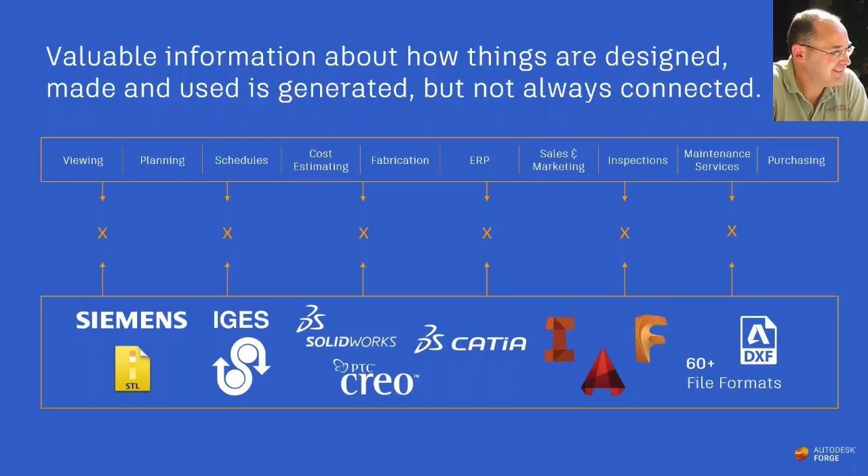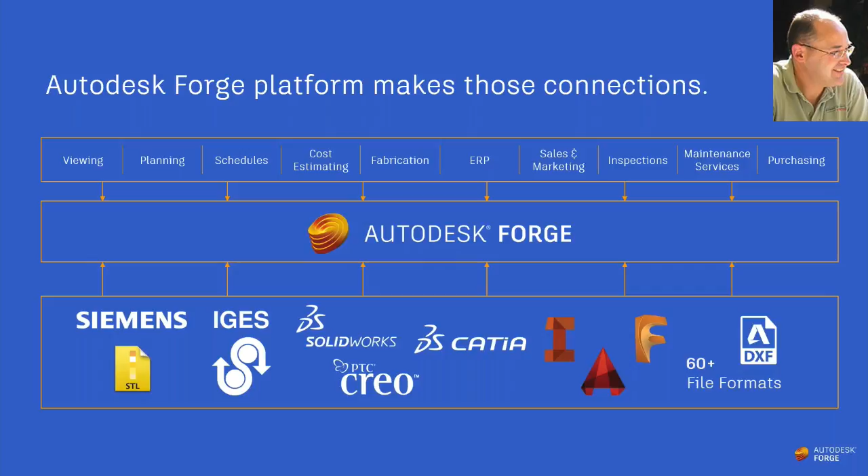So one of the several things you use Forge for is very simple, easy collaboration, working with almost any format used for design and engineering. Whether it's coming from SolidWorks, CATIA, Pro-E, an IFC file used for a building or infrastructure, an IGES or STEP file, a SketchUp file or a Rhino file, you want to share information with people, maybe visual, maybe geometric. Actually, it may be just data, just counting things, number of bolts, number of doors, checking attribute information, things of that sort. It's one of the base things that Forge can deliver, and it's very much about collaboration.

It's sharing in a very easy way. We got a lot of our early adopters of Forge building sharing on their intranets. So you get customers who want to safely share information among their employees, and they may have thousands of employees. They want a very easy way to do that, without passing around binaries that are either too heavy to work with or proprietary where they don't want to let their IP out in the wild, where you can run into rev control hell.

The other thing is about keeping data at the center, keeping that design and engineering data in one place, and different people can get the information they want when they want it, getting a view on that information from your central data repository, wherever that happens to be. Instead of passing files around. Once you start passing files around, who's got the latest file? Do you have the latest information? Was that cost estimate or project scheduling done on the latest version? Versus going to get that information right now from the current data, and getting out of these rev control issues.

Examples. So I'm going to go through a number of code samples. Some of these are code samples you can get on GitHub. Some of these are what our partners have done, so you can see what real people are doing with Forge out in the wild with our customers. I'm a real believer, and I suspect many of you on the line are software developers, and seeing a good code sample is worth 1,000 words. Or maybe you're a product manager or product designer thinking about how you might use Forge. Sometimes the best way to learn is to see what other people have done.

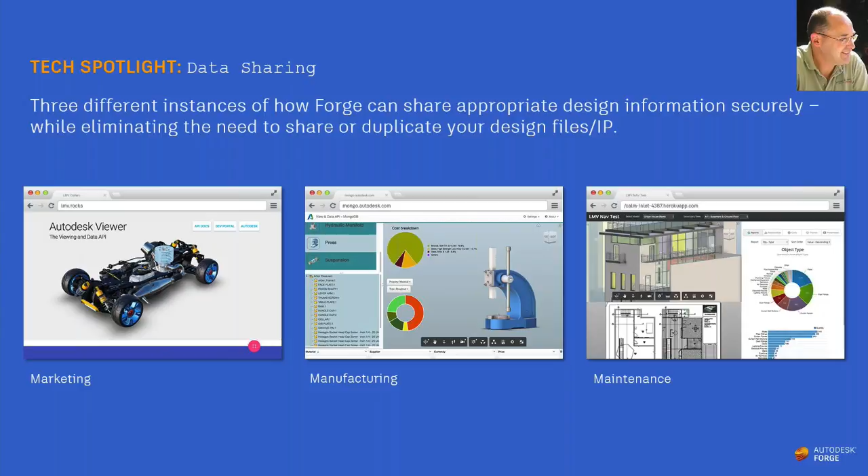So we're going to do that. Let me get my browser up.

Okay, here first I'm going to start. This is kind of a marketing website built using Forge. This is a responsive website. It looks like a bunch of JPEGs. You can open this up, this site lmv.rocks, with your phone. It works just fine. This model at the top, you think it's a JPEG, but clearly it's not. It's a model.

You can see we have lots of models here. A V8 engine, an earth mover, I've got a house, a car. Some of these models are from SolidWorks, some are step files, some are for Inventor, some are from Fusion, some are from Revit. Doesn't really matter.

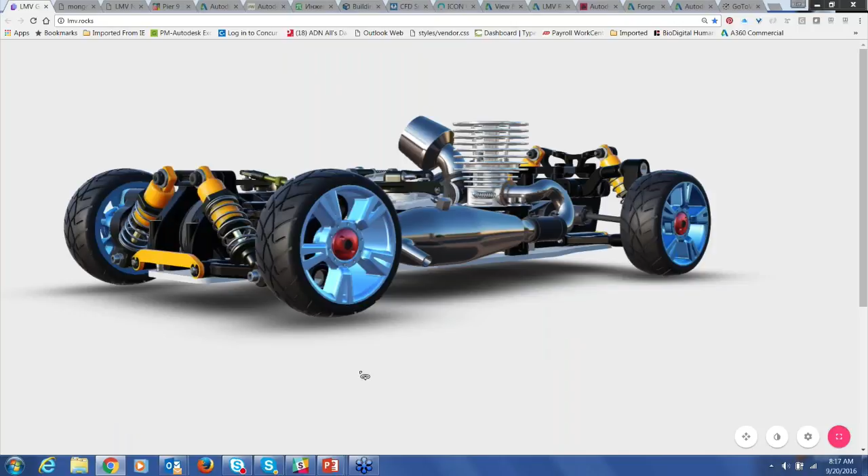Because this is engineering data, it has structure, so you can do things with it. For example, here, I'm just going to explode this. We'll take it apart, and it actually comes apart smartly. It comes apart firstly at the very top assembly level, then as you start to pull it apart, it starts to pull apart sub-assemblies and sub-sub-sub-assemblies. You can go in here and get information you want.

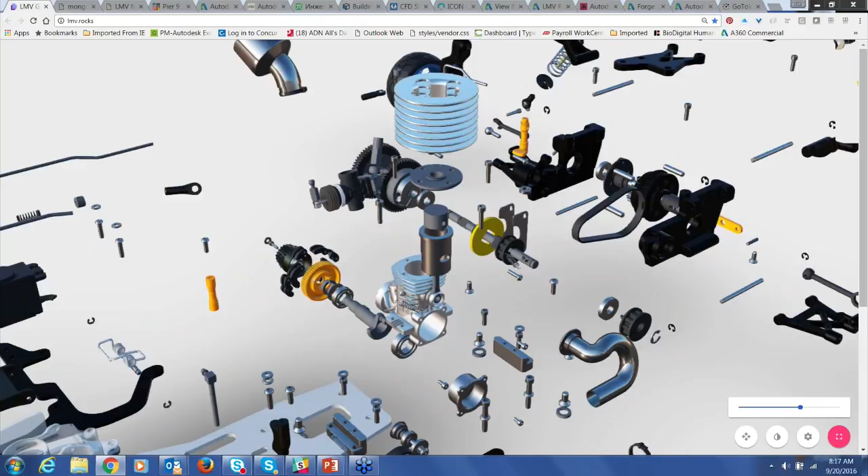Again, this is on a browser. This works on Safari, Chrome, Firefox, Opera, Microsoft Edge, the very latest version of Internet Explorer. I will tell you, Internet Explorer itself has been a bit cranky because this is based on WebGL, so just be aware. It's also based on quite a bit of open source. The viewer uses Three.js underneath. So as a developer, there's the APIs we give you access to, but there's also the APIs of Three.js itself, should you want to hack it, so to speak.

So I'm just going to pick this house. You can see this house loads up. It's got materials, it's got a model. This works with office buildings and is pretty scalable. The largest model I've ever seen using in Forge was 9 gigabytes. It was like 25 linked Revit projects, and it works just fine. You'd be surprised.

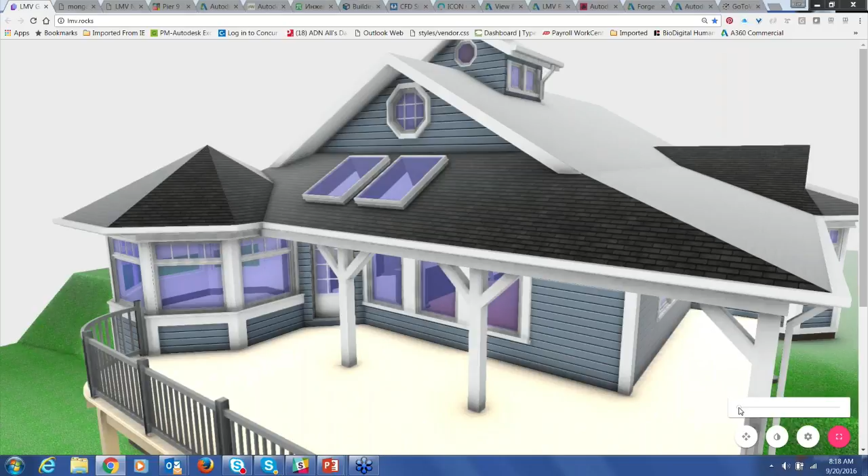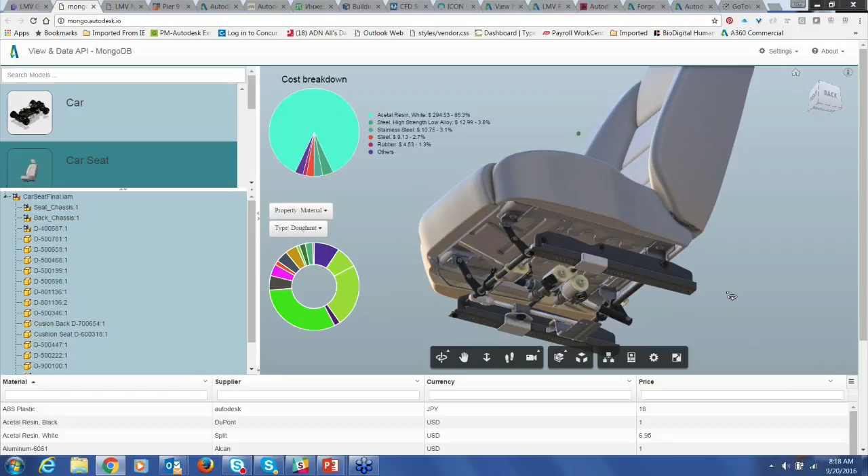Another example, thought it was good to show that often when sharing, there's data coming from external data sources. So we have a model here that came from Mechanical Modeler. This one came from Inventor, but again, could be SolidWorks, could be ProE, could be a StepIges file, could be a building, could be from Revit, could be an IFC file. In this code sample, we've linked it into an external data source, and we're using a Mongo database.

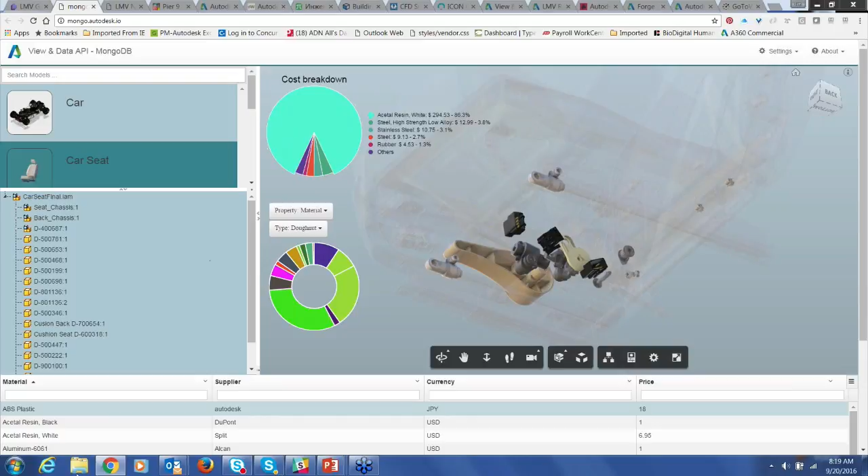I'm just going to double click on ABS Plastic, and it drives the view. Here's all the ABS Plastic in the model. And I can do things like update the cost of, well, here, see this? Acetal resin is clearly really expensive. So acetal resin white - I'm going to go here and change the pricing of acetal resin white, and you'll see this JavaScript pie chart update when I do this.

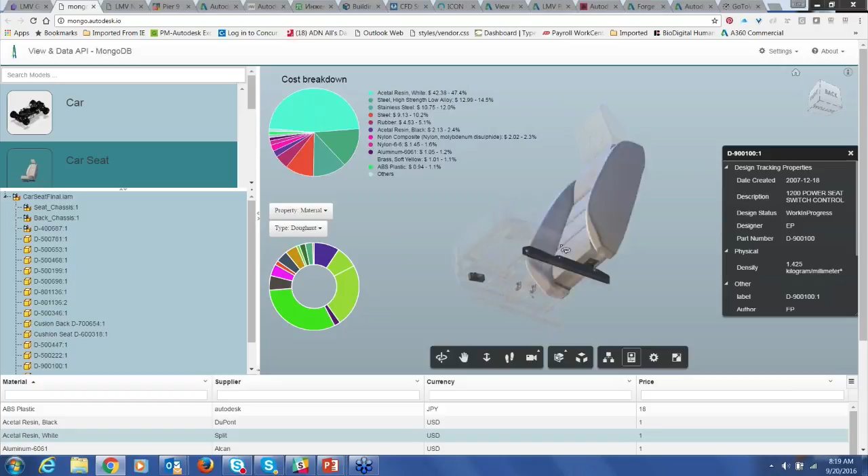Right, because it's JavaScript, I'm in a browser. This is a website that was built in less than 2 days by a full stack web developer. And look at property information. So let me go in here and pick this part.

Center of gravity, area, density, mass, volume. This information all came from the model. Design tracking, part numbers. But down here, database information. This data is not in the model. This data is coming from an external data source.

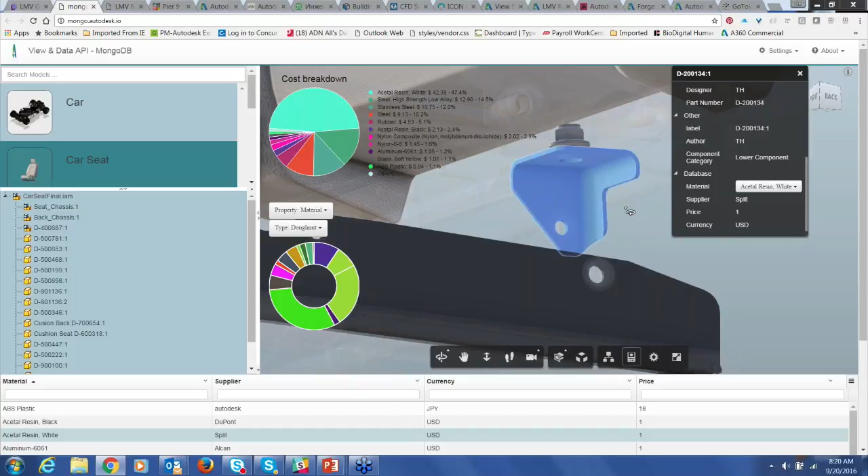We've done this same sample with SAP, NetSuite, Salesforce.com, Microsoft SharePoint, and it's relatively straightforward. Most design entities have a unique ID, an identifier. Frequently, it's a GUID, that you can use to create that key link between an external data source, whatever it happens to be, and the model itself.

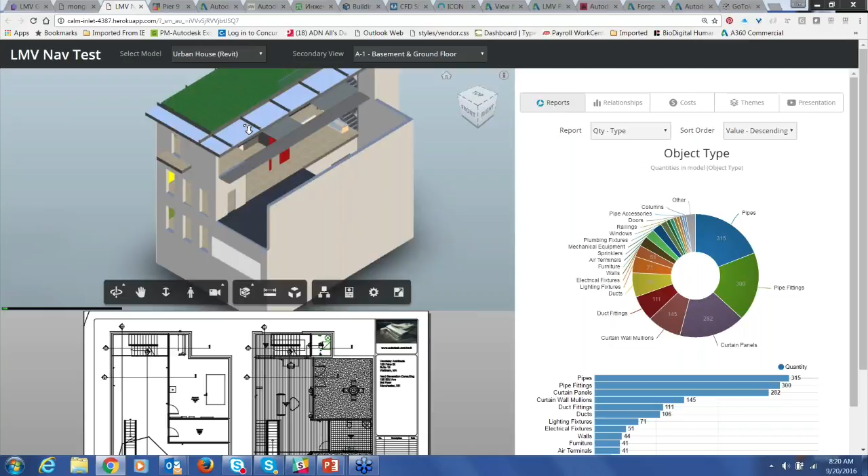Another example, mixing 2D and 3D. I've got 3D, I've got 2D. I can go here to my pie chart. This pie chart, these bar charts, this is just open source JavaScript graphing. So I'm going to pick ducts. Now, look here, I've highlighted in 2D, I've visualized in 3D, just by clicking on a pie chart.

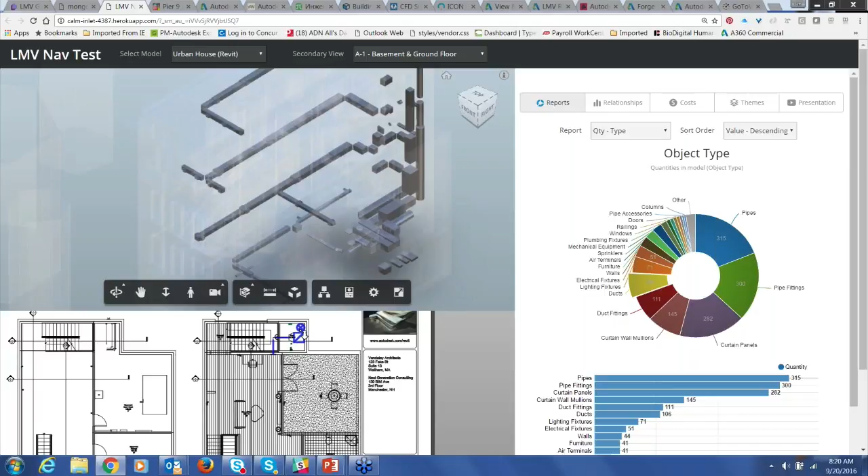Maybe I want to see the pipes. Again, highlighted in 2D, visible in 3D.

Let me do something like, let's look at properties. Let's go in here and look at the property of this fitting, pipe types, offset, start offset, end offset. What kind of system is this? This is a sanitary system. It's a copper pipe, it's 4 inches in diameter. All this engineering information available.

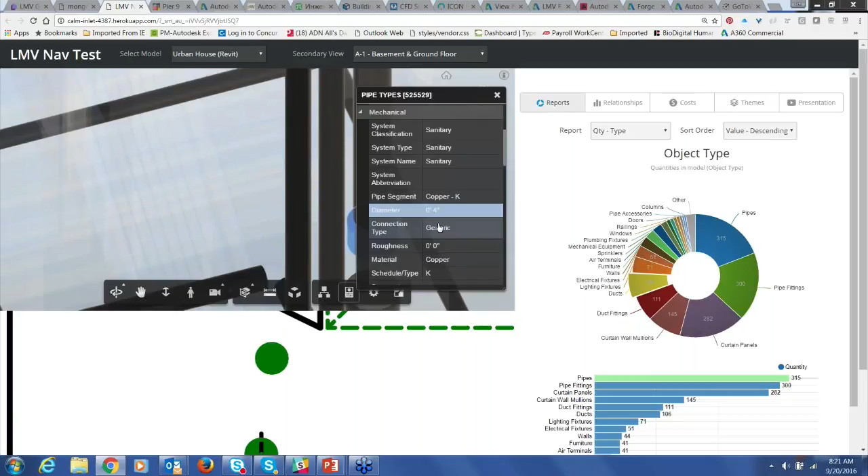Now again, depending on who you are, maybe you want to work in a 2D view, and you can do that. Maybe you want to work in a 3D view, and you've got these pie charts, which are basically doing queries on the metadata, on the attribute data.

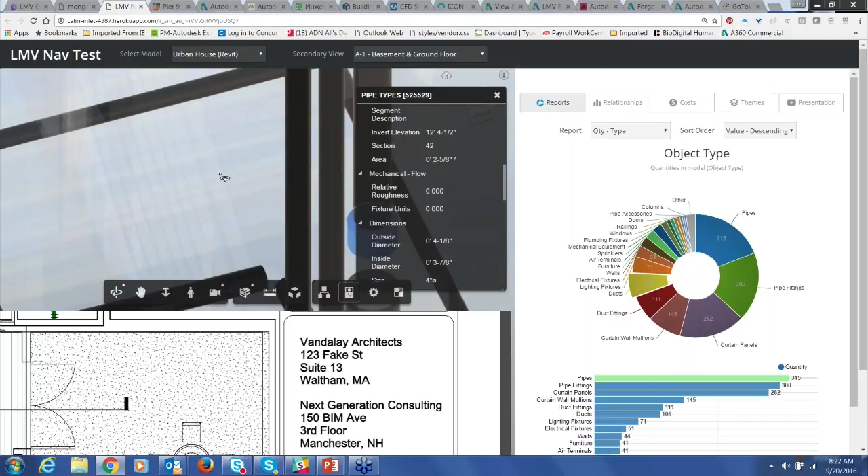This was a website that was put together by one of our engineers. It took him about a month, but he was taking 2 hours here, 2 hours there, so it's kind of less than 15 hours total. And he was just learning, it was kind of first time through. If you have a full stack web developer, you can grab this code sample and build a similar 2D, 3D experience in a day or two.

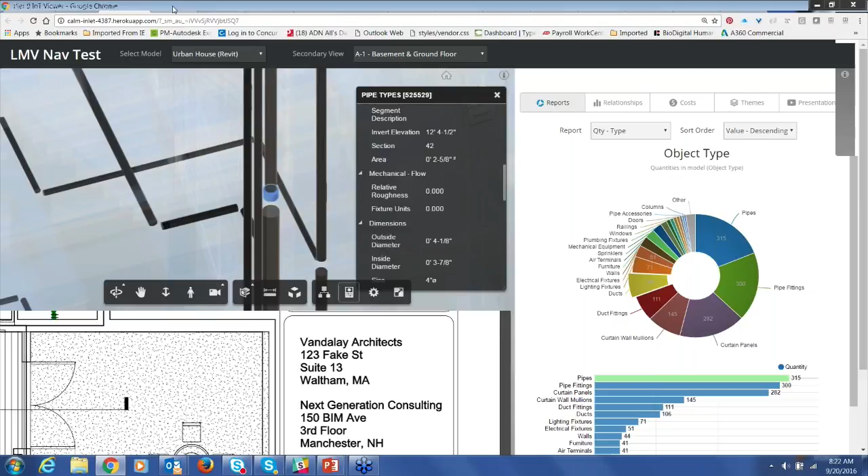Some other things we've been doing for fun is hooking up models to real-time sensor data. So we'll call this fun with IoT. This is Autodesk's Pier 9 lab. We've got a machine shop there. I can go here, click on this icon, and here's live sensor data from the machine.

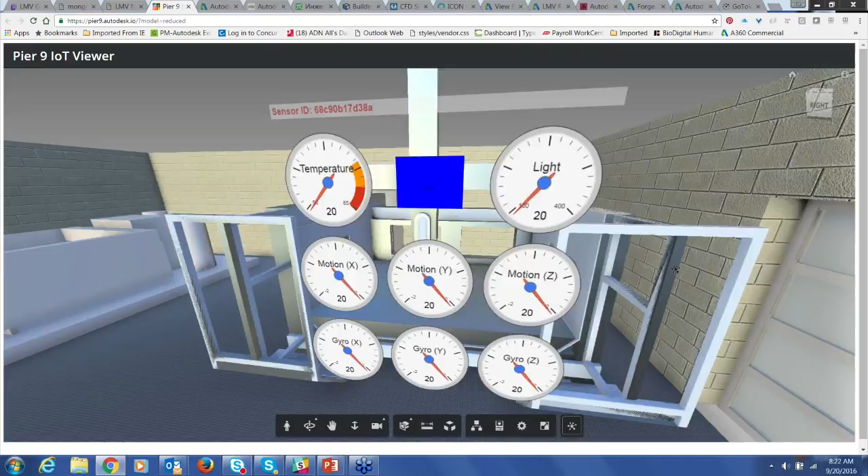Now, reality is I'm not getting sensor data right now because the sensor data is not live at the moment, but I think you get the idea. Let me just show you that again, I'll pick a different machine this time. All right, so maybe I want to come over to this machine, see this sensor data. So an interesting way to project data.

We've also got some code samples that do things like take the data, and instead of giving me dials, it gives me numeric values. We also have it where we've done thematic mapping, so maybe you want to see the temperature of a surface in a thematic, color-coded kind of way.

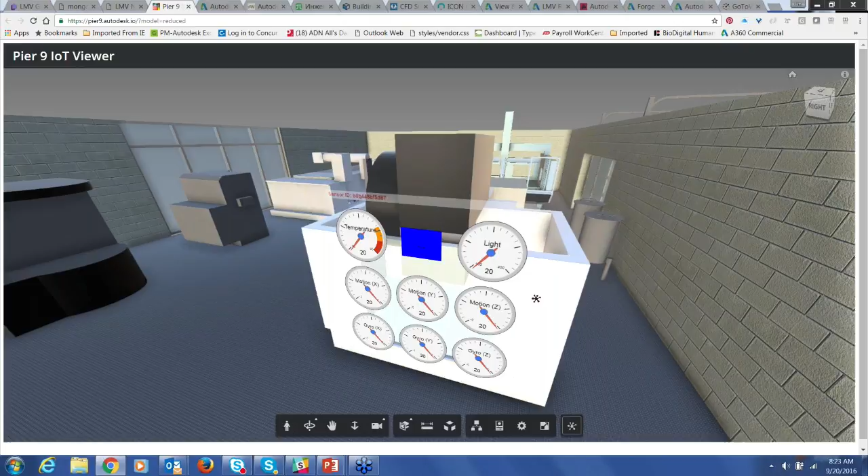This is a new one. This is a very simple, trivial thing, but I think it really helps make a point because at this point people are going, how do I get my data in so Forge can work on it? So we built a little code sample that shows using Three-legged OAuth. It allows me to pass my files that are in Box, this is my corporate Autodesk Box account, to Forge, so I can view things that are residing in Box that are not residing with Autodesk. And it's a perfect example of Three-legged OAuth.

I've got to log into Box. I've got my account, but now it goes, hey, this data is actually within Autodesk, are you Autodesk authorized? So now I log into my Autodesk account, and Box says, hey, is it okay, Autodesk gets access to this Box data. Okay, now what you see here are all my folders on Box right now. And I can go here and pick a part or a model or whatever.

Now I'm going to do a bit of an endurance test here, this is asking a lot. So Autodesk Hospital, this is actually a very large Revit project. See this? Preparing the view. Autodesk Hospital metric, it's preparing. And you'll see how fast this is, hopefully things are fast. Oh, translation in progress, you'll get an idea on how fast one of your models can be. And here it comes. This is, you'll see here in a sec, this is not a small model.

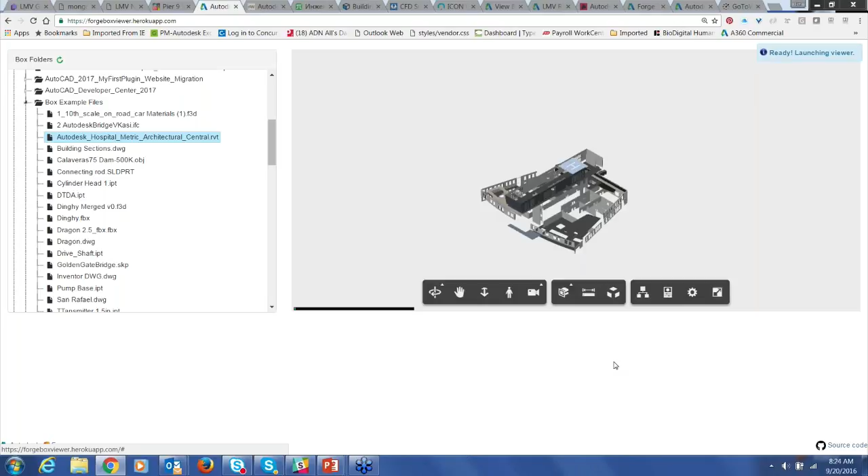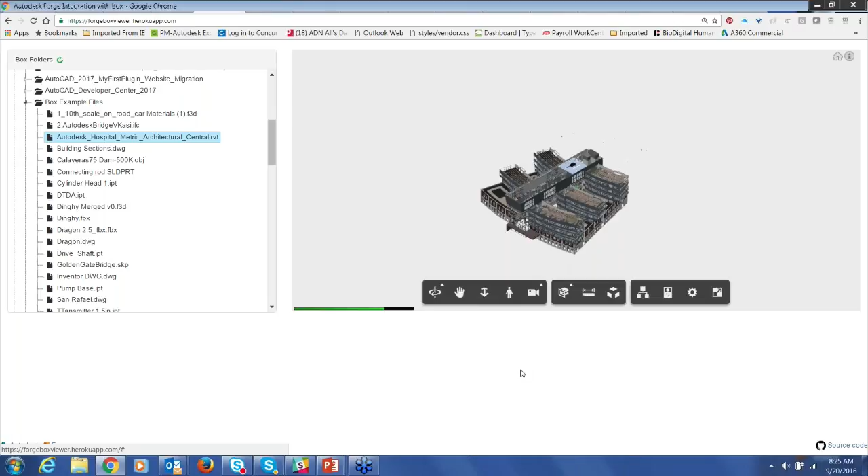Now this code sample actually uses what we call a transient bucket. It passes through Autodesk for a very short period of time and then gets deleted. It's taking a sec to load up all the detail of this hospital. I'll give it a sec to do that, and then we'll zoom in and take a look, and you can get some idea what we're dealing with here.

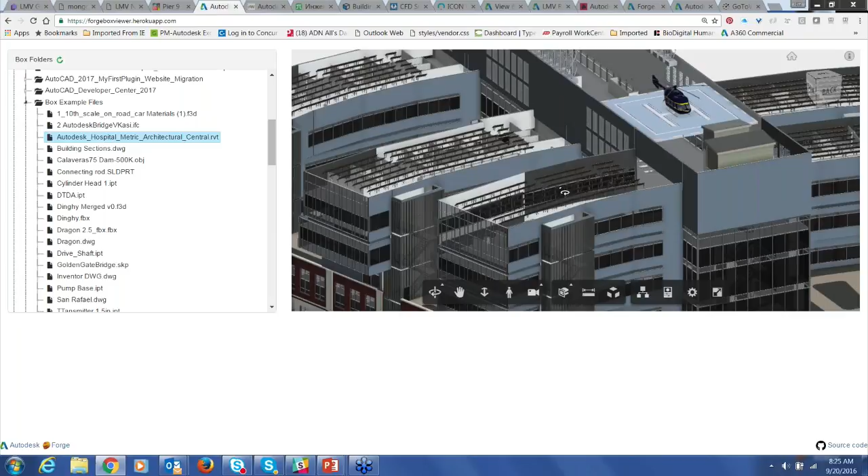All right, so here's this hospital. In fact, when I go in close, we can see the helicopter sitting on the roof. It takes time for this model to refresh. You can see the solar panel sitting on the roof, and I can do crazy stuff like section this big hospital live in real time.

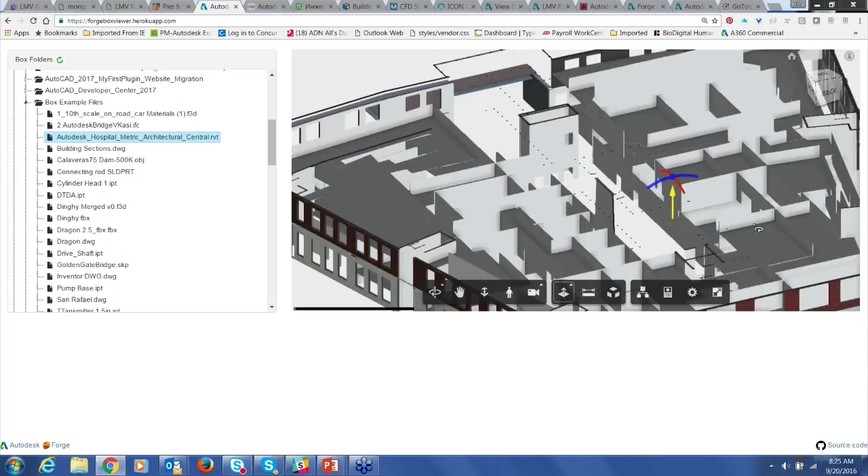Let's do a section. I'm going to pull down here so we can see things like what the floor plan looks like in this hospital, or what the lobby looks like. Let me go way in here. Okay, very simple code sample, shows you how you get your data in and visible from wherever that data sits today, whether you have it up on the cloud or it's sitting on some local server.

So those have been Autodesk code samples. I thought I'd now show some examples of what partners have done.

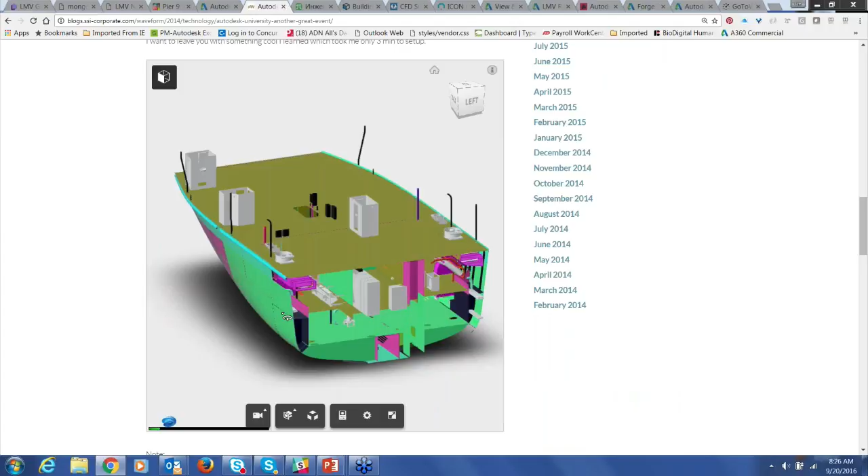Here's a partner of ours, ShipConstructor, who has a blog. It's a customer blog. They show their shipbuilding customers what's possible. They stuck a ship into the web page of their blog. I like the fun part: it says here, took me 3 minutes to set this up, 3 minutes to embed a model into a web page.

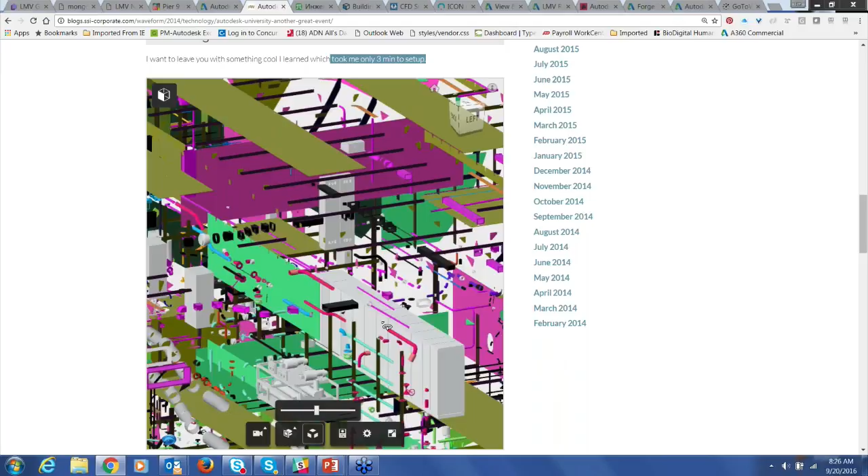And some of our partners, they shock me, because this is not a small model. I'm going to take this apart, and you can kind of see how big this model is. It's huge. And then we can do things like look at properties again, which is for a shipbuilder.

This is what it's really all about, right? Material. Here's that GUID we talked about. Most entities have a unique ID for an external data source. You can see now, with a little luck here, material.

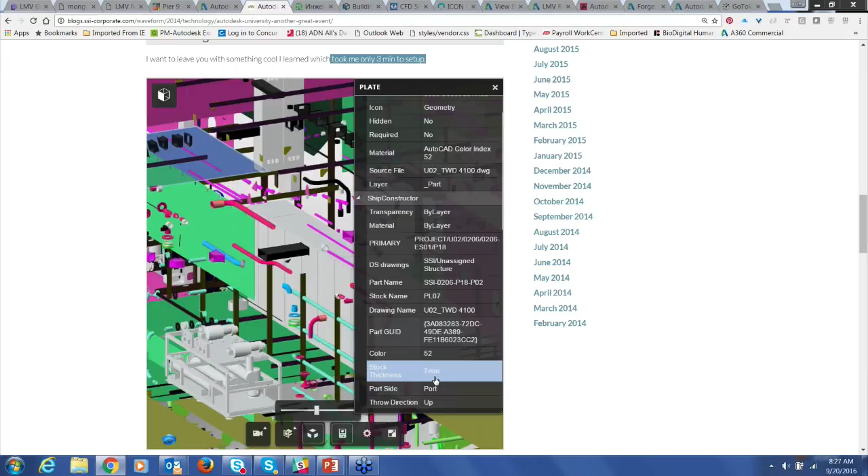LCG, TCG, VCG - you know what those are? Those are the coordinates of the center of gravity of that part, that piece of steel. Ships are made of steel - 1/4 inch, 1/2 inch, 1 inch, 2 centimeters, 3 centimeters. These parts are heavy. You do not move many individual pieces of steel around without a crane, and you need to know where to grab it.

So the idea is that you're down in the shipyard and you're hooking up this piece of steel to an overhead crane, and you need to know where the center of gravity is, and you can get it just from having a laptop or even just your phone there.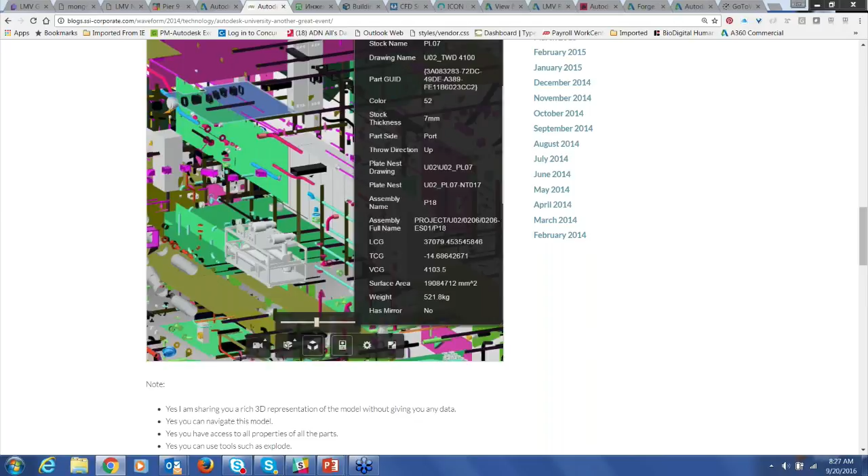Another example, this is the dean of, I think, the School of Civil Engineering at St. Petersburg Polytechnic University. He saw Forge and said, hey, I want to show off some of the work my grad students are doing. So they went and added 2 models to his website. Again, this was like a 10-minute kind of deal.

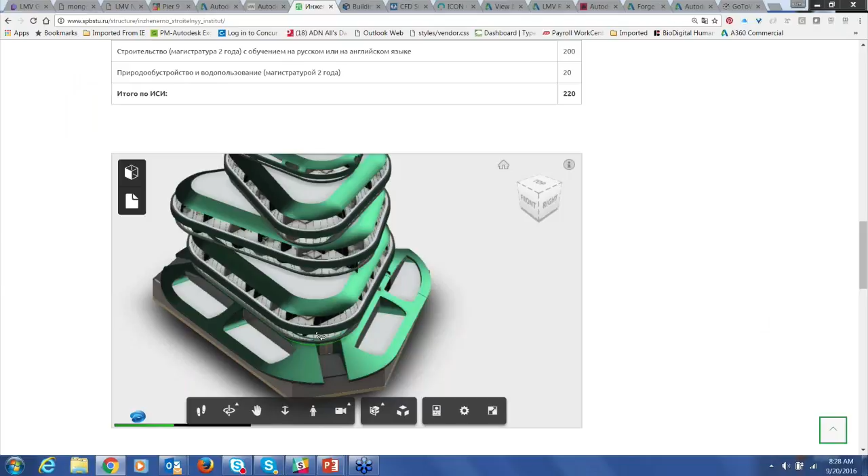I'm going to have some fun with this one, and we'll cross-section it because this is such a crazy building. All right, so we can go in here. Maybe I want to find out what the building core is about for this crazy building. I can go right in here and see what's happening in the building core.

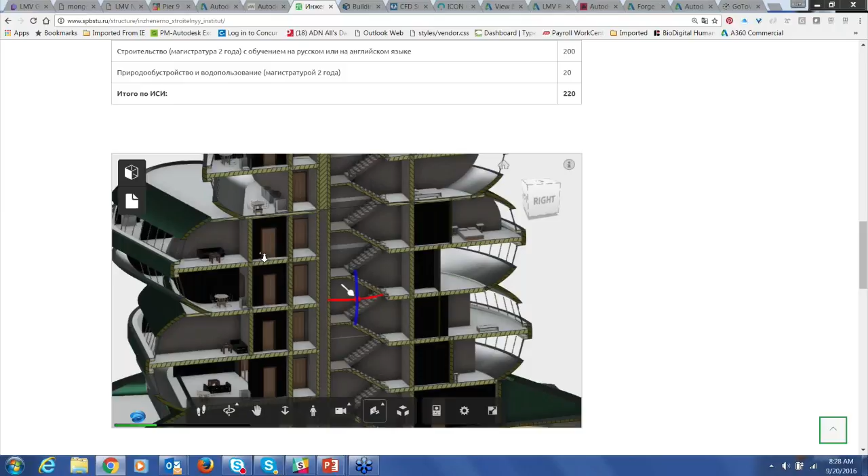Another example, a partner in the Netherlands is helping their customers, construction companies and architects, show off the work they've been doing with building information modeling. They have hundreds and hundreds of, in this case, Revit projects up here online, open to the public. You can go here.

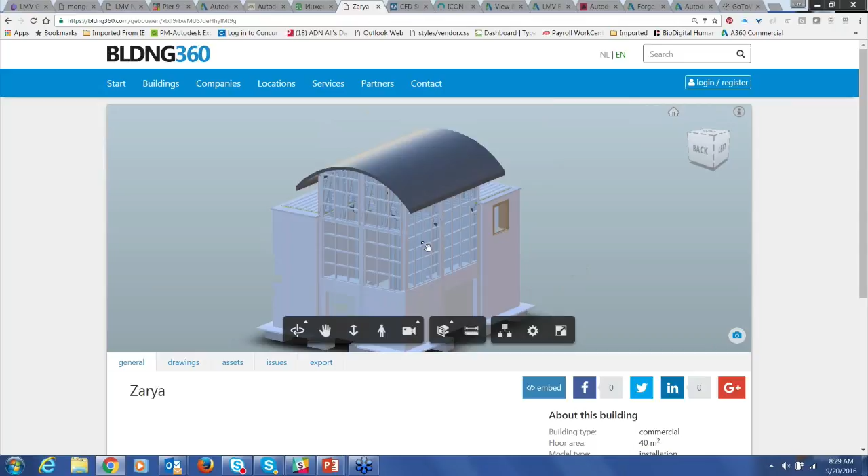Here's a building. Again, maybe I'll show sectioning so we can kind of see what the floor plan looks like. All right, so here's the floor plan. Oh, maybe I want to tilt it just for fun. Maybe I want to do a vertical section, something along those lines. So I can do sectioning, and he's changed the UI completely.

For drawings, he's just made that a tab. Here's the drawings, and I can just pick a drawing, and there's the drawing. So he's kind of changed the UI up to make it easier for people to navigate 2D, 3D.

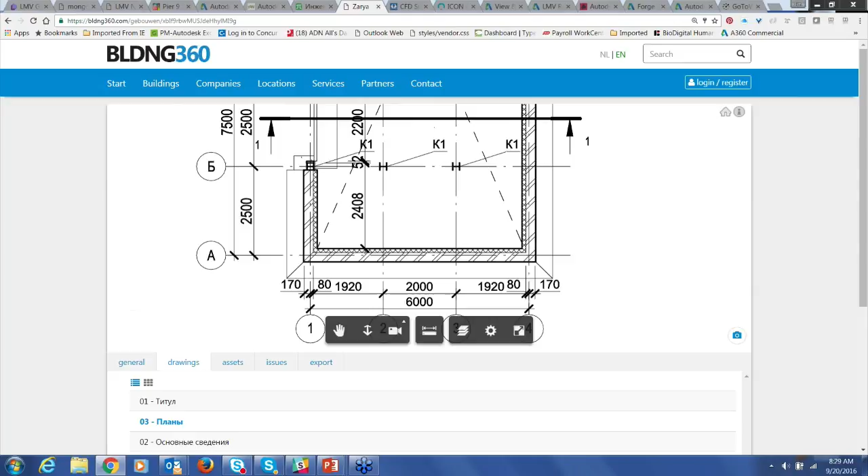Here's a partner doing CFD. This is a partner who really took advantage, they know WebGL, they know Three.js, so they wanted to push the technology. This is CC Tech in India, and as an aside, they're a consulting company doing system integration work. Should anybody want help, they offer a good value price, being based in India.

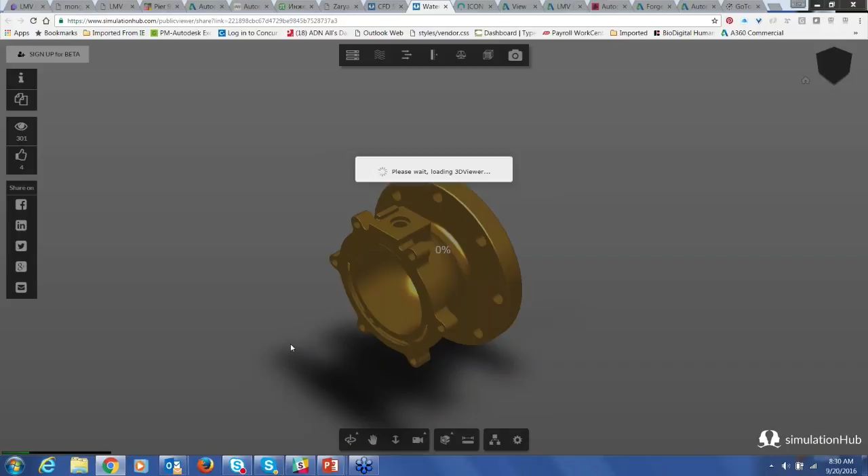So they're using Forge here, and here's their sectioning. They've done crazy stuff like adding animation, and you can see the flow lines being animated. Again, the beauty is using Forge, they already had a CFD solver code, so using Forge with the solver code they already had, they put this together in a week or two. They've also done stuff like you can see in the corner, with a different user interface for section cutting.

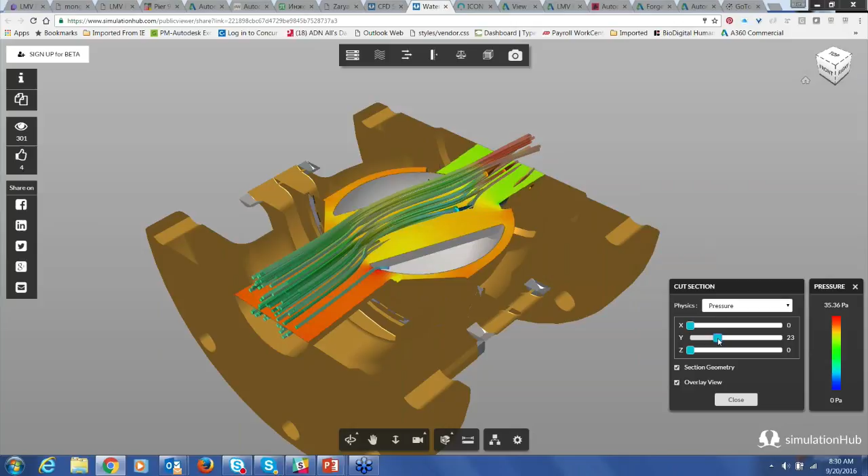If I want to move this section, I can use these sliders. They've actually left the Autodesk standard Forge Viewer sectioning in too, so it's easy to do.

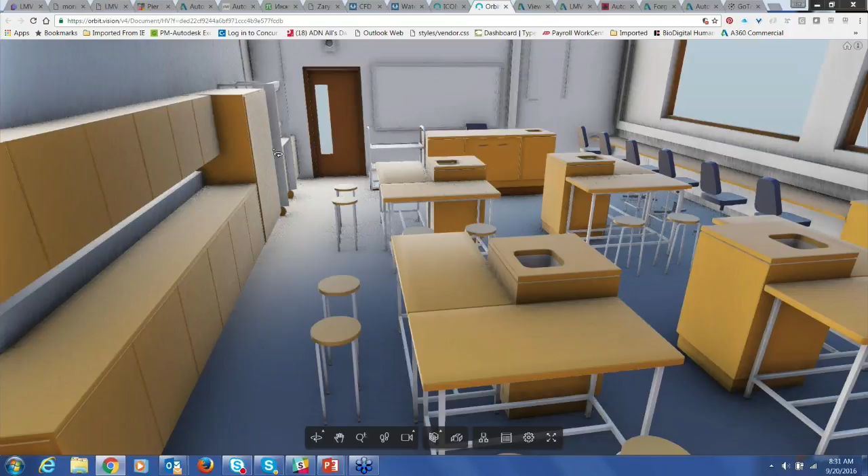Another partner of ours, Icon, helps retail stores. I think the 10 biggest retail stores in the UK are customers of theirs. They're giving their customers the ability to view their facilities, both what they have today and what it could be in the future, what a new layout might be. They've integrated Forge into their website so their customers can navigate and see. This is some kind of lab, like in a university or a school.

Now for those of you into reality capture, point clouds and mesh, flying drones, that kind of thing, I thought I'd show you the result of the reality capture API, which is not public beta yet for Forge. We expect it to be public beta by the end of October, if not fully released by that time.

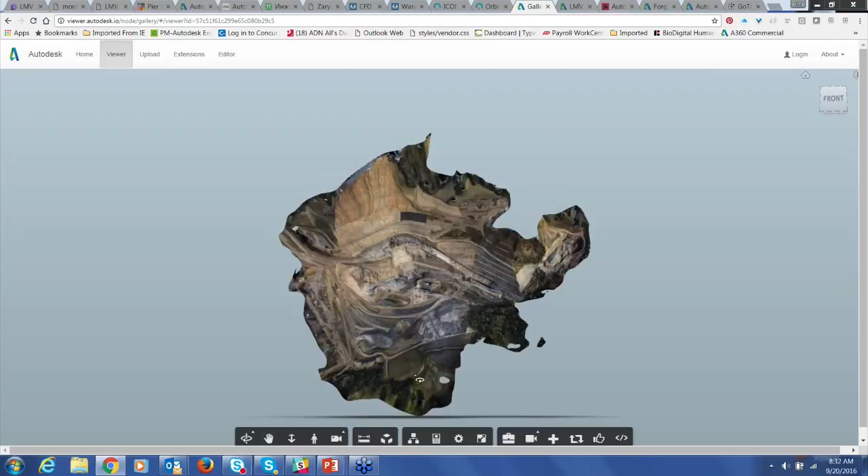This is about taking photos and turning them into 3D meshes, where you can do things like diffs - maybe find out how much dirt got moved, or do a survey. This is a dam site here in California. Maybe I want to inspect it, right? So I fly a drone, spend maybe an hour taking pictures, bring it back, upload the pictures to the Forge Reality Capture API, get the mesh, pop it up on a website where people can check it out, and do all that in a couple hours, a morning so to speak.

So you can survey a construction site every day and see what's happening. We've got a model here, this is the 500K triangle model. I have one with 2 million, but it's actually not all that much slower. So it works amazingly well.

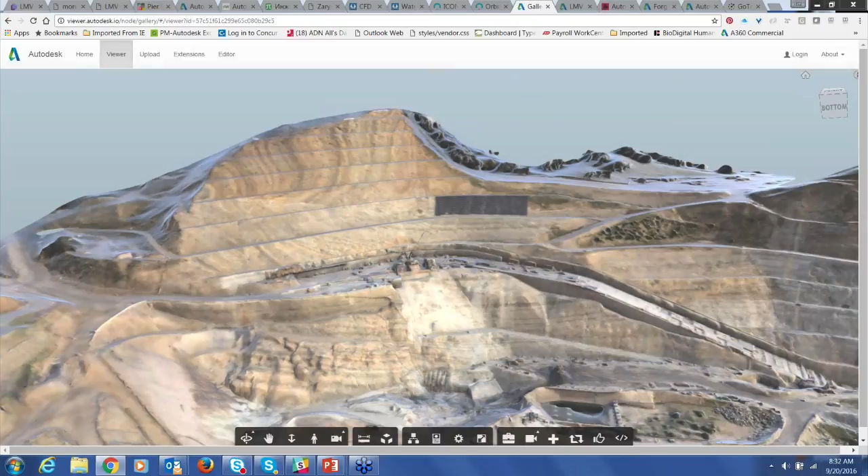Some of the other things with the Forge Viewer, because it's based on Three.js, you can do searches on GitHub and find code samples. So we found a code sample for adding notes to your view, and we just added that right into the Forge Viewer.

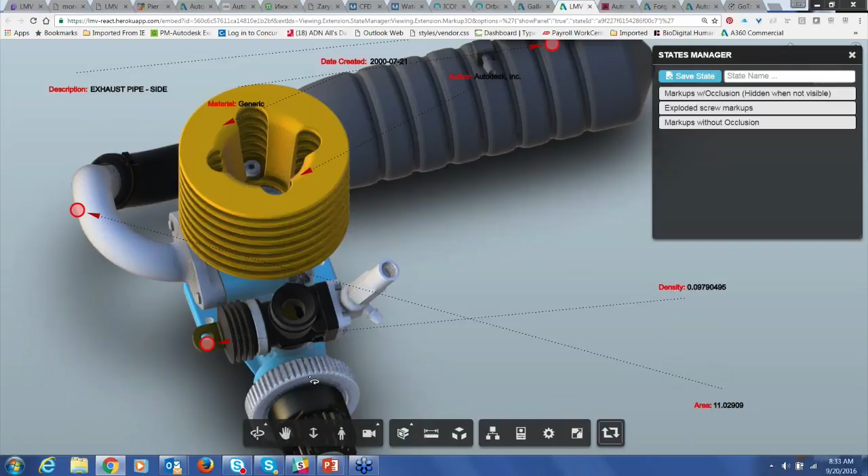We also did things about saving view states - what's the location and orientation of the model, also what's the explode state. So you can basically jump around from view to view to view, or I can go in here and make a custom view.

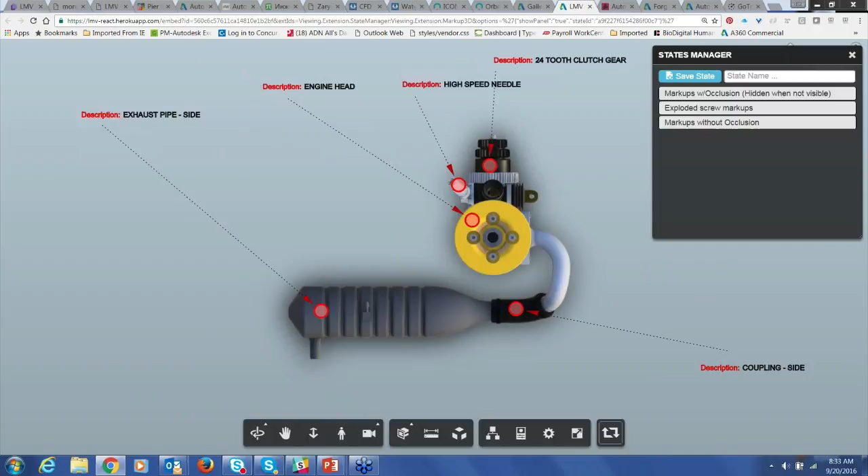I'm going to come right in here and save a new state, and let's call this cylinder head top. Right, we'll save this state - there's a new state. I'll go back to some of these other states. Wow, there's a lot of notes on that one. And remember, I saved this cylinder head top, and there it is.

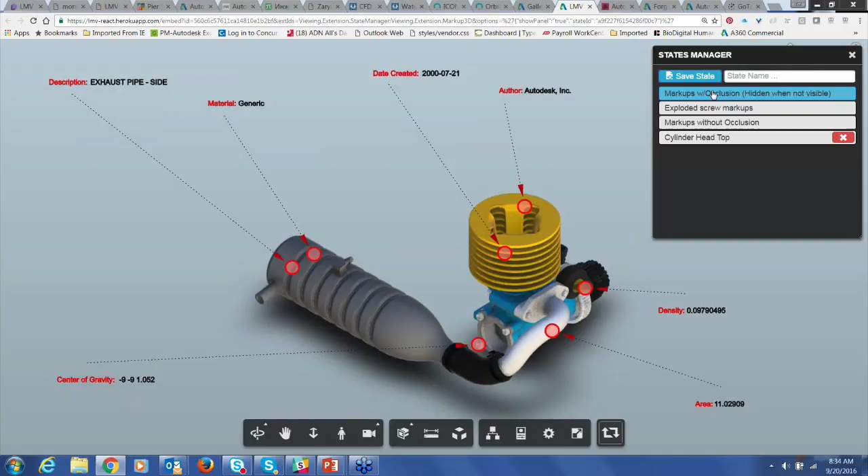So I can very quickly create a walkthrough, an inspection of a mechanical device, or maybe a walkthrough of a building with, frankly, zero coding. You could build a site to do this - one of our engineers built this site out in a day or two with the code sample. You can replicate this in a few hours using your favorite model.

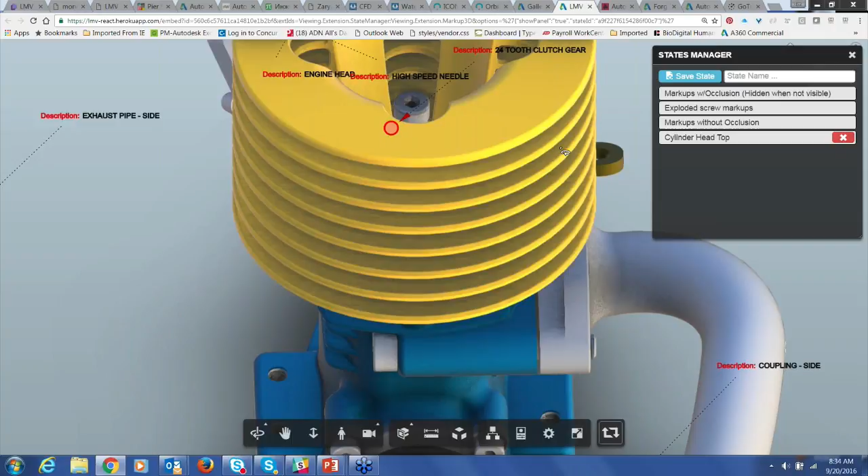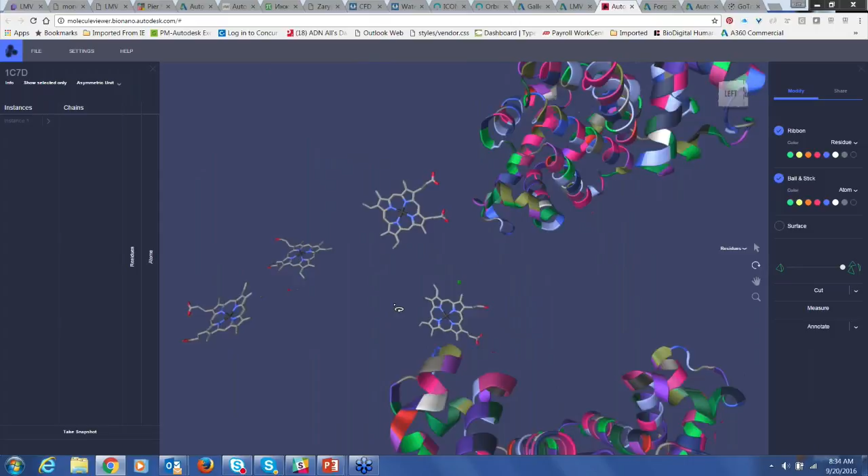I'll tell you, university researchers love it - the idea that they can analyze a molecule, analyze a piece of DNA, and then share it with their colleagues around the world through a simple website.

Okay, developer.autodesk.com is the go-to place. You can see the existing fully released commercial APIs right now.

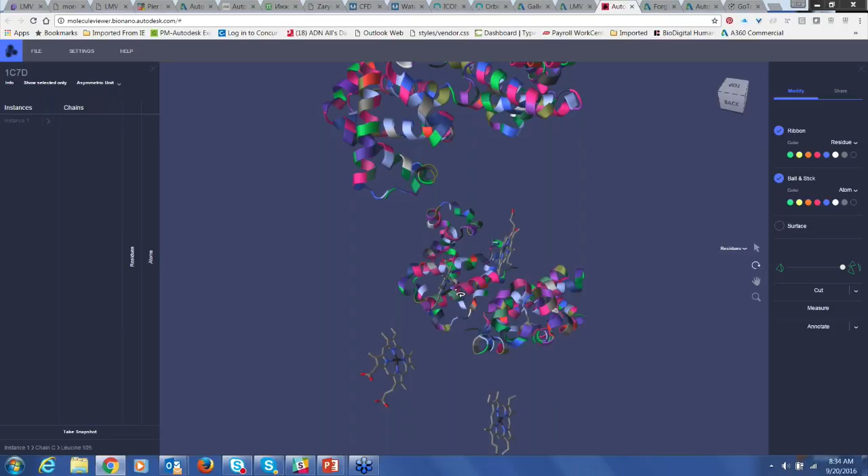Data management API for getting your data up and down. I showed you that box example where we use that quite a bit. Design automation is AutoCAD up on the cloud—we used to call it AutoCAD IO. Model derivative is doing the translations, and one of those translation options is a viewing format, for which I showed a lot of. And then there's the viewer itself.

JavaScript, HTML5, REST-based architectures—it's all standard web technology. So the ability to totally customize the experience is quite easy.

You can see beta, 3D print API, BIM 360—this is specifically working with BIM 360 docs. And I mentioned the reality capture API. This isn't in public beta yet, but it's coming shortly for those of you who might be interested in that.

And here on the website, there's lots of examples, like let's go look at model derivative. API basics, field guide, supported translations, file translation, thumbnails, geometry extraction, data.

Remember, for a lot of people, what they want is data. Maybe it's somebody in purchasing, cost estimating, scheduling, someone along those lines where being able to count things and knowing what's in the model is every bit as important as the geometry itself.

Okay, and just to inspire you, we've had some people do some really crazy things, building really wild experiences. I'll show you this one because it's too much fun.

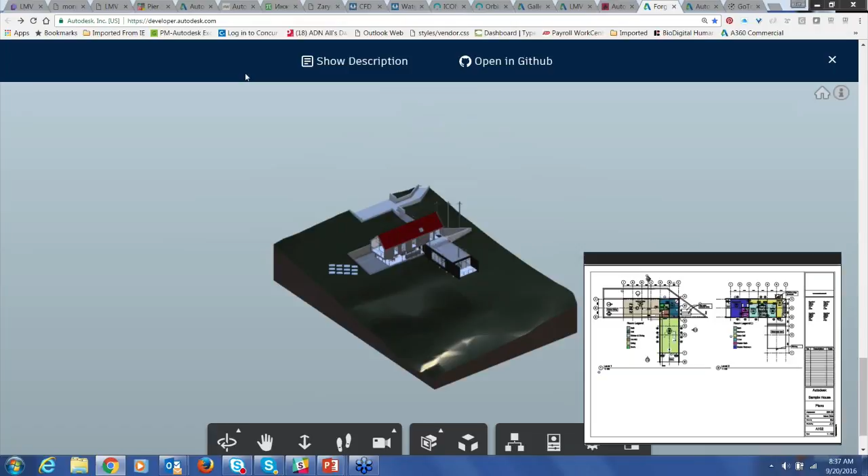All right, so here's the 3D model. And sure, if I'm my sons who are 25 and 23, who grew up on 3D games, they're going to go directly and deal with the 3D model. Yet my mother might want to use this 2D thumbnail.

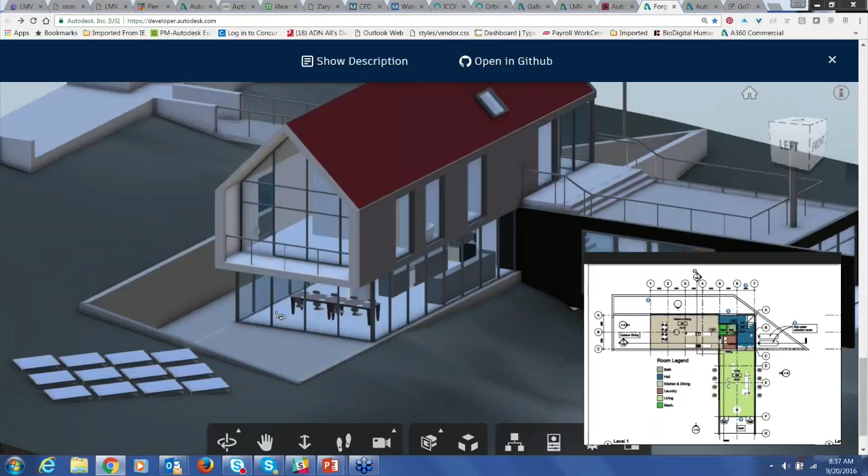I don't know if you can see this red arrow here. I'm going to put that into the model, right? And I can now drag this red arrow around the 2D layout, which is driving my 3D model.

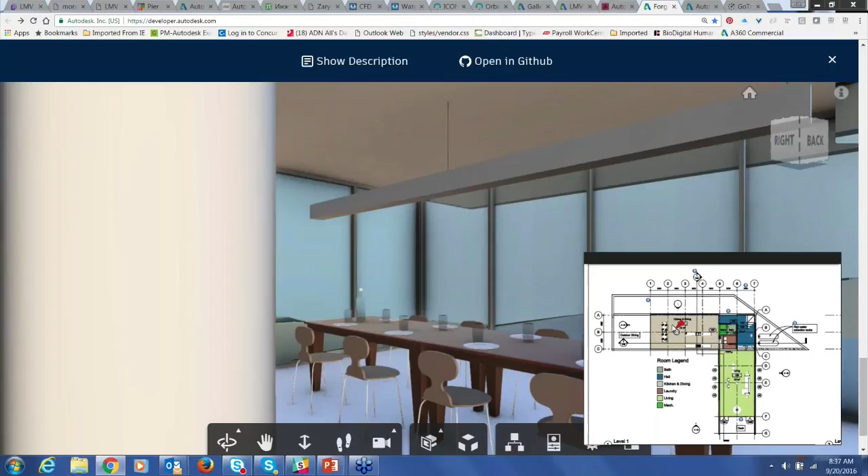Or maybe I want to go outside and walk around the outside of the building. Easy enough for me to do. Let's go see what this building looks like from outside.

Okay, and I think I'm reaching the end of my demos. Yeah, that's it for my demos. I'm demoing enough, I'm getting too carried away here. Sorry, folks, but hopefully you're enjoying it.

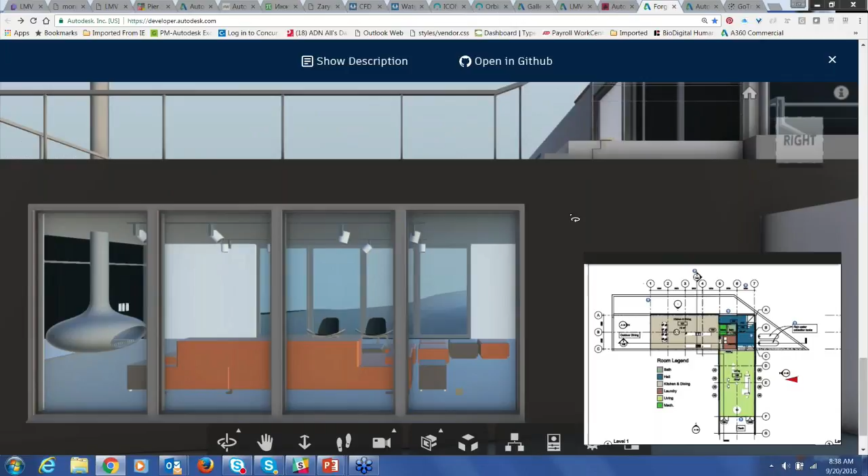So who's using it? I looked yesterday to see how many people are working with Forge today. These are people, what I call API keys, which is in most cases the number of companies working with Forge today, but not quite—some companies may have 2 or 3 keys.

We have just over 400 monthly active users today using Forge. You can see some of their names. Some of them are large companies—J.E. Dunn's a large construction company in the southern part of the U.S.

We've got service providers, people like Dragon Innovation, who are helping people outsource manufacturing. 3DR, 3D Robotics, flies drones around, captures existing conditions, like that Calaveras Dam I was looking at earlier. OpenBOM, who's pulling BOMs out of mechanical assemblies. AMC Bridge, like CC Tech, they're a service provider.

For those of you who are liking what you see with Forge but may not have the resources handy, we've got several consultant system integrators who are quite up to speed with the use of Forge should you want help.

And so, why Forge? It's about competing in the future of making things—it really requires a different approach. Now, I'll tell you, for most people using Forge the first time, they do something simple. They take an existing piece of infrastructure they have, whether that's a desktop app, a mobile app, an intranet, an extranet, and they add some capability to it, being able to get at engineering and design information, whether that's the data or the model, and they expose that to people that couldn't in the past.

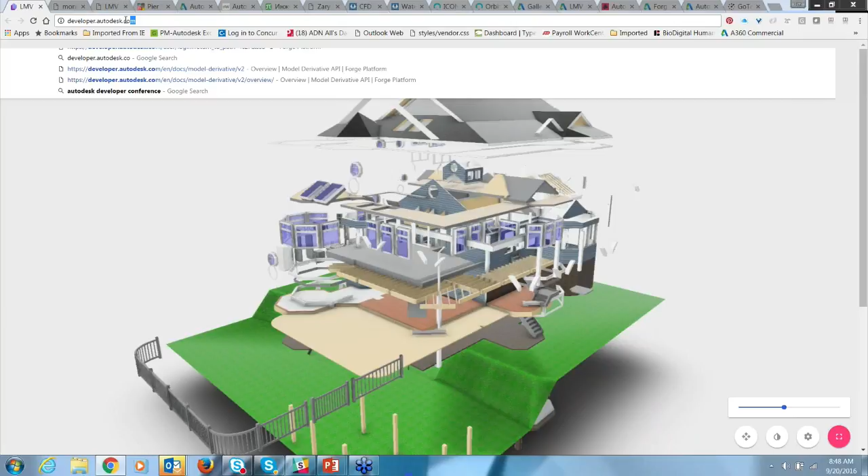In fine print, no charge for API use - click here for preliminary pricing, which opens a PDF file. Now, this is about to change - we're about to make some announcements. You can see where we are right now: it's actually free now. Our expectation is it will stop being free at higher levels of usage around the first week of November. We're September 20th right now, so you've got probably still six weeks of free, unlimited use all you want. Come that early November - and again, I hope it's early November, could be later, won't be earlier.

You've got this Explore tier: 25 uploads, 25 asset generations, 100 models processed, 1 CPU hour - that's free per month on an ongoing basis. If you need more than that, you go to the Build level: $400 a month if you subscribe for a year, so that would be $4,800 for a year. And you can see the capacity there: 300 uploads, 300 assets, 400 models.

Now I'll tell you, when we start charging in early November - and this is between me and you - we are probably going to go live with a special: you've got 10 times that capacity, so 3,000 uploads, 3,000 assets, 4,000 models, 250 CPU hours. Some of that is because we don't have the pricing system figured out yet - we're still sorting through what the payment system and process is going to be for people who need large capacity, and it's probably going to be, my guess, April before we have that sorted out. So between now and then, to make it easy, come November, we're going to give people 10 times this capacity, which we believe for 99 out of 100 people using Forge will get them what they want.